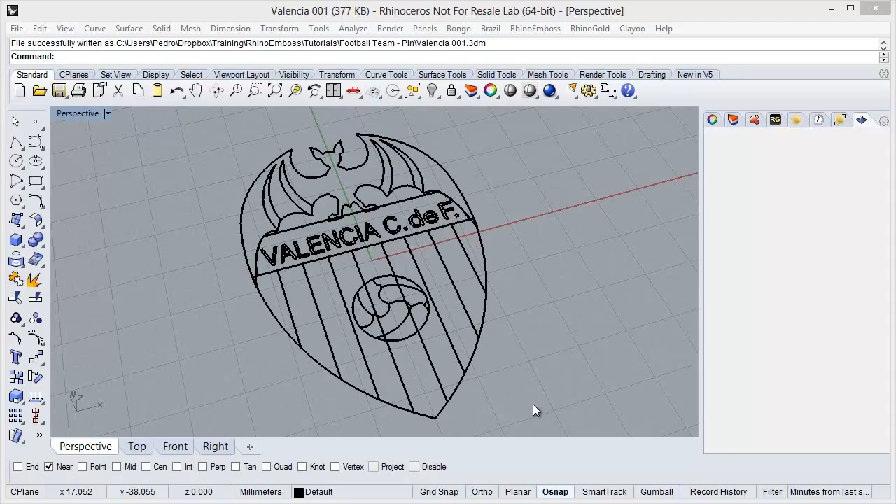Hi, in this video we will see how to make this emblem using RhinoEmboss. As you can see, I have created all these curves, and now the idea is to use these curves to create the relief. So let's take a look.

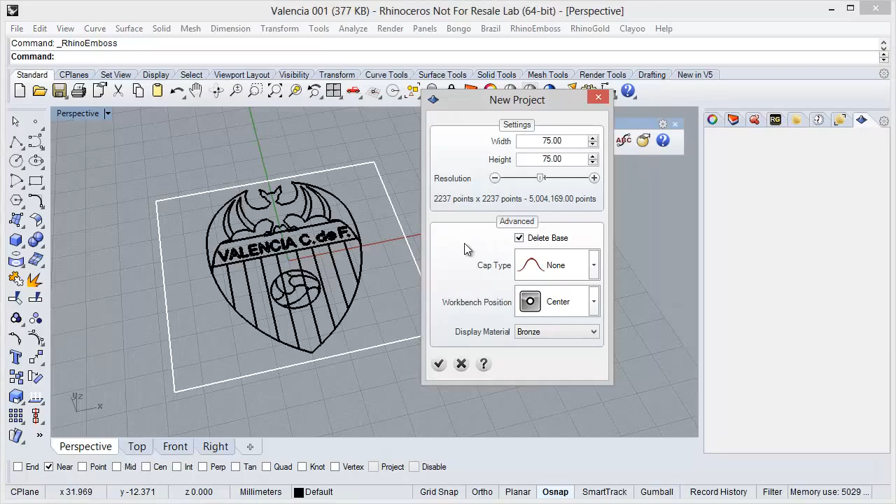The first step, I select the emboss tool and I need to define the project setting. So I need to define the working area, the resolution, the cap type, position, material, and if I want to delete the base in the end. So I just need to check, and now I can start with RhinoEmboss.

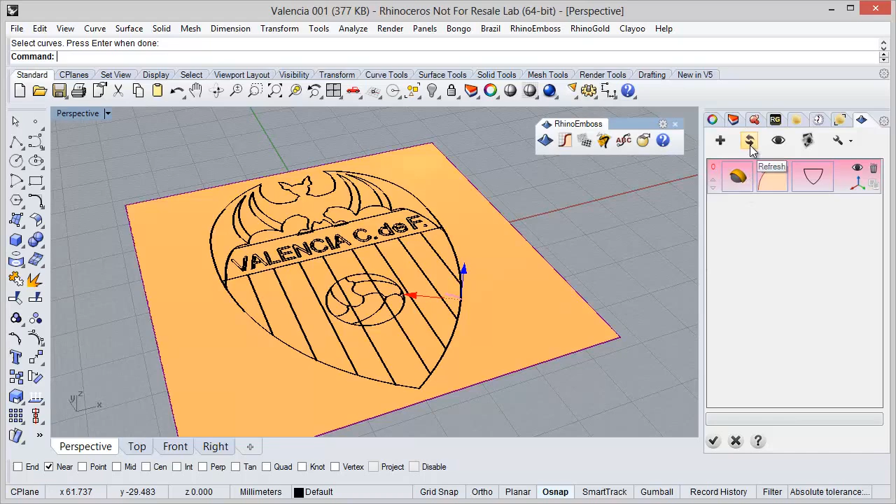So I'm going to start with an operation by profile. The curve, I'm going to select this one, and I'm going to adjust a little bit the gumball, something like this, and refresh to check the result. I'm going to adjust 1.58, refresh again, and this is the idea.

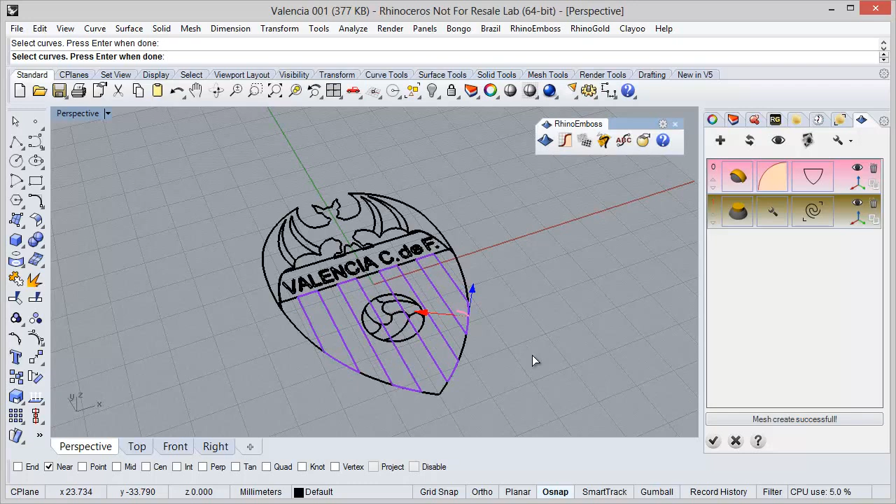Now I'm going to add a new operation. In this case I'm going to define extrude, and the curves I'm going to choose this one and this one. After this I just need to define the extrude distance, and the style of operation I will add to the previous relief. So I just refresh, and as you can see, the extrude operation was added.

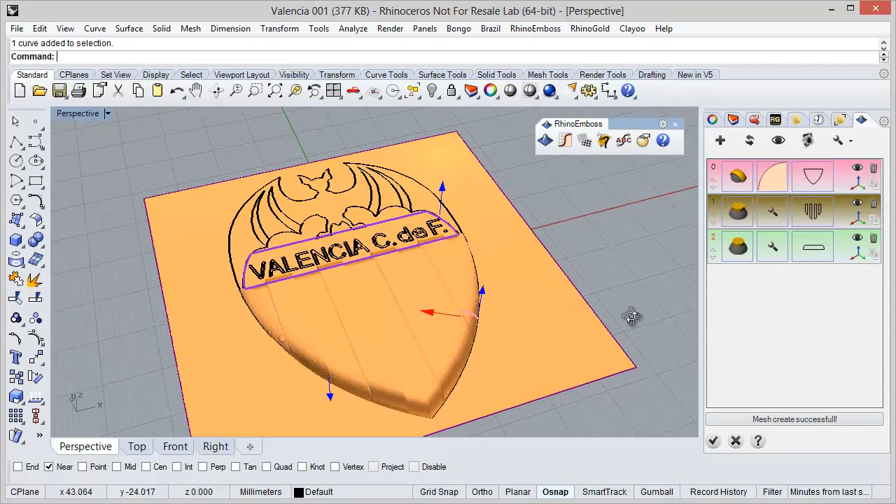So I'm going to move on. In this case I'm going to select this curve, and add a new operation. I'm going to define the operation as extrude, and the distance I will define as 1.2 millimeters. So I just need to refresh, and as you can see, now I have the extrude added to the relief.

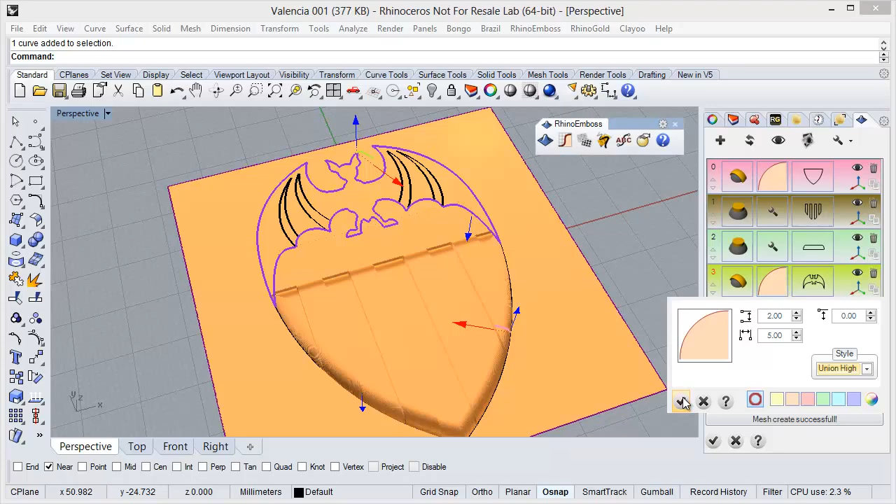In this next step I'm going to add this curve, the bat. So I just need to add a new operation. The curve is automatically selected, appears here, and I just need to define the parameters. In this case I want 2 millimeters, and I want the union option as well. I'm just going to define the gumball something like this and refresh to check the results. As you can see, now I have the bat.

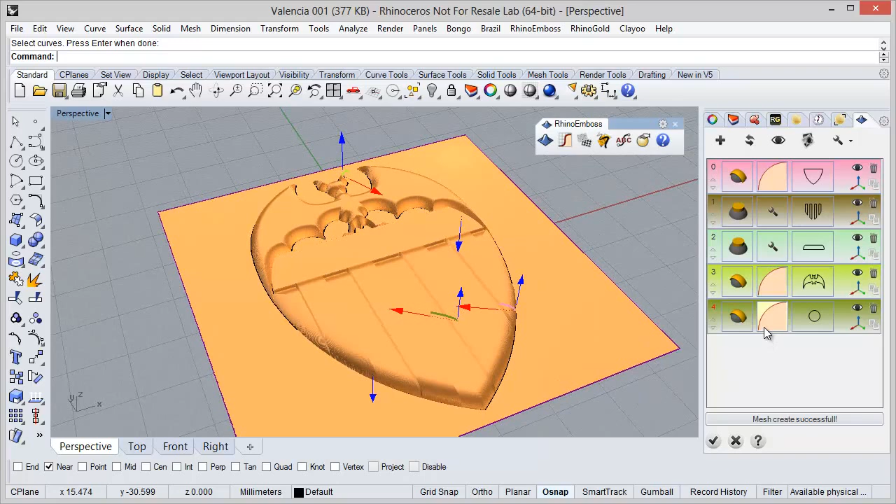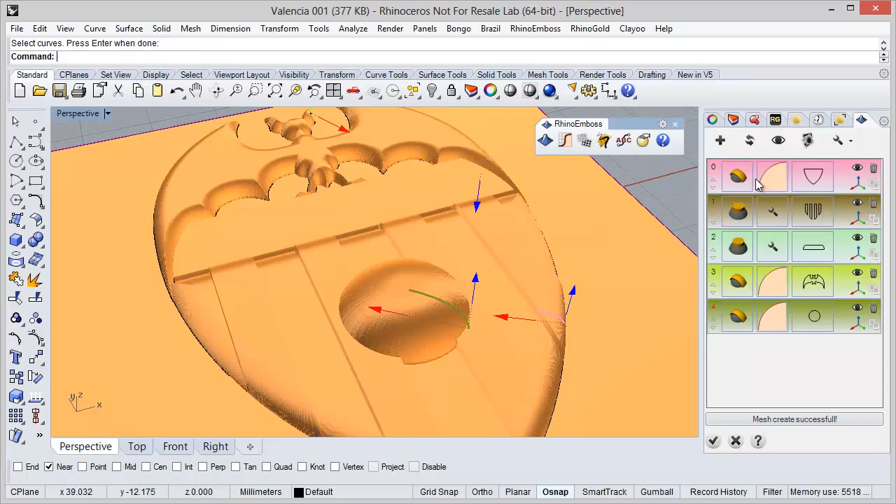Now I'm going to add a new operation by profile, and I'm going to select this circle. In this case the parameters I want to start with 1.5 in Z, and total height I can define 4 millimeters. I want union as well, and probably I need to adjust a little bit the gumball, but first I need to refresh to see what I need, and I will adjust something like this. Okay, this is the idea.

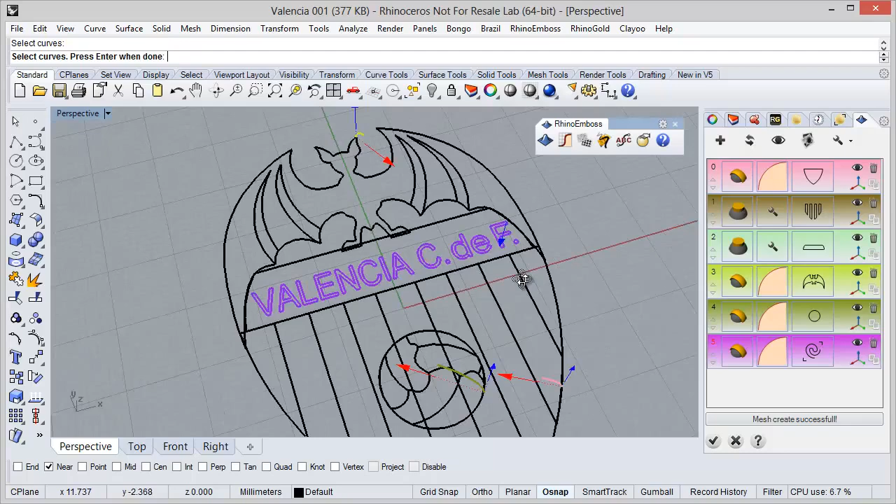Easily we can add our curves and define all the parameters. So I'm going to create another one for the letters. I'm going to select all these curves, and now I will define the extrude operation type and distance of 1 millimeter, and add to the previous relief. So the result was easily done.

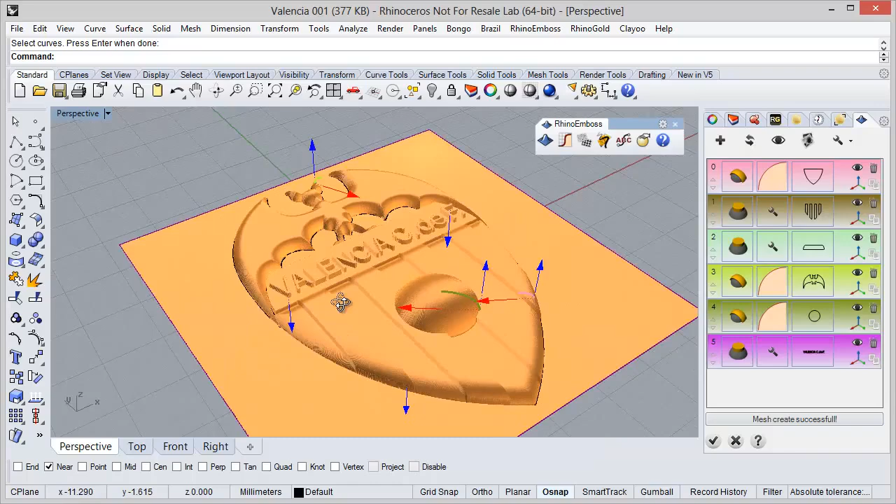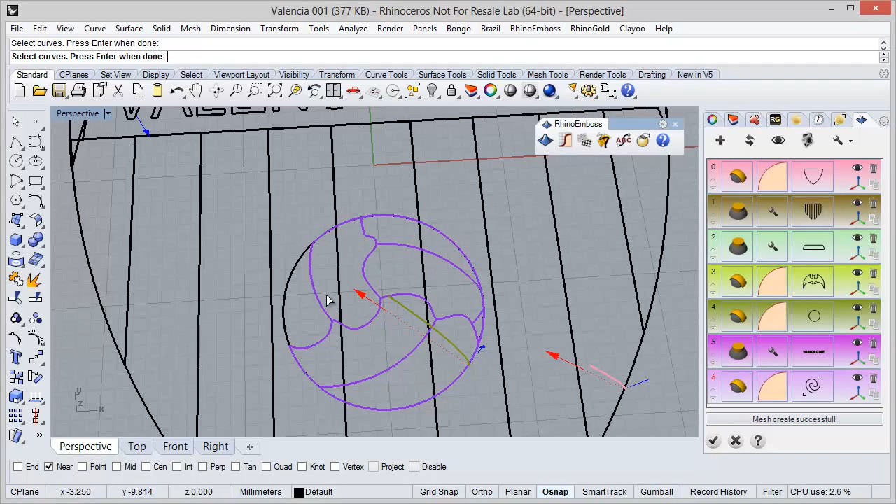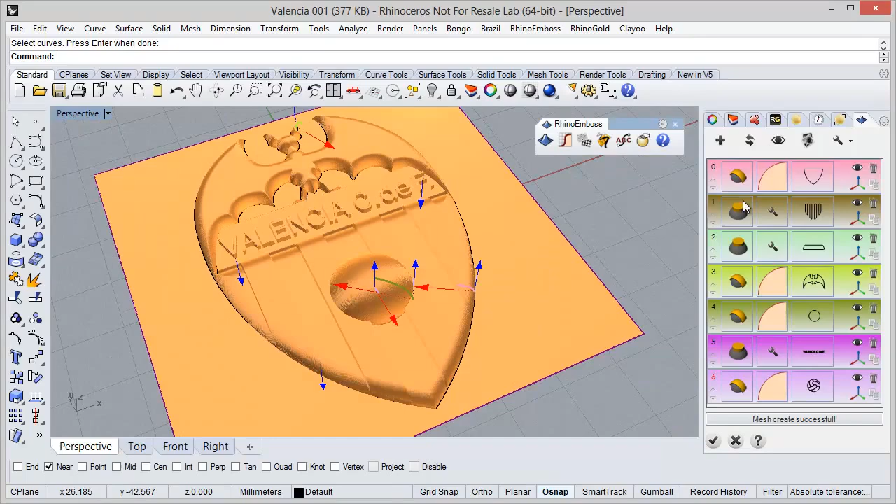Just extrude the curves as you can see, and now I'm going to add an operation by profile, and I'm going to select all these curves - this one, this one, this one, this one, this one, this, and this. In this operation I'm going to define 0.5 millimeter, and the gumball I'm going to adjust to 1.5. So let's just refresh to check the results, and as you can see, easily I have the reliefs created.

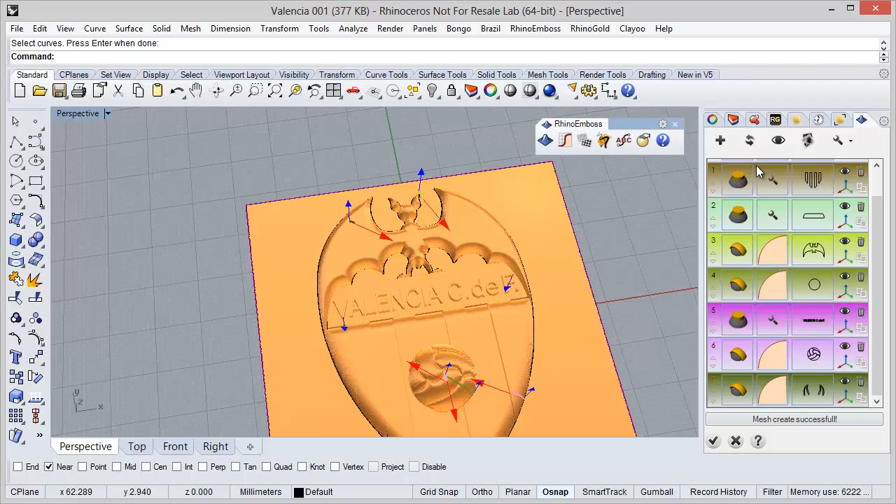So now I need just the last part. I'm going to add a new operation by profile as well, and the curves, I'm going to select these 4 curves. I just need to define the parameters, 0.5, and adjust the gumball something like this. Just refresh, and as you can see, now I have this added.

In this case, I'm going to change and subtract instead. So now the result after refresh, as you can see, is subtract. So this is the idea - easily we can define any shape using these curves and defining the parameters.

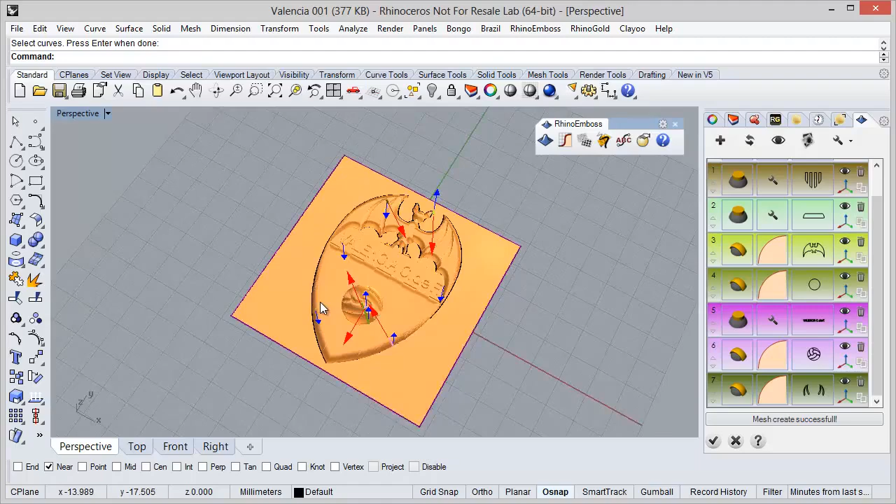And now after this, I just need to check to add this mesh to the document. Okay, now I have the mesh created, with all the parameters defined. So as you can see, it's very easy to create any kind of shape. I hope you like it, and thanks for watching.